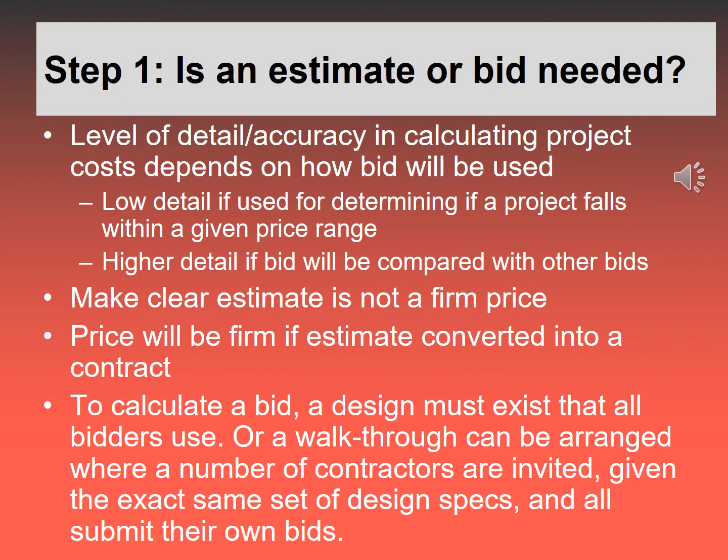Reading down through the actual slide here, an estimate is lower detail, not a firm price. If a price can be made firm from an estimate, you can convert that into a bid or contract. To calculate a bid, a design must exist that all the bidders use, like I said, having a walkthrough done.

Here is another example of an estimate sheet, but this one is filled out, and it's different — it has a lot more detail. Mary Green wants a deck, a 10 by 10 deck with rails and stairs, including staining of the deck, and they've got all kinds of detail here: the paint, permits, travel, etc., quantity, unit price of materials, hours, labor for each of those things, and a total price.

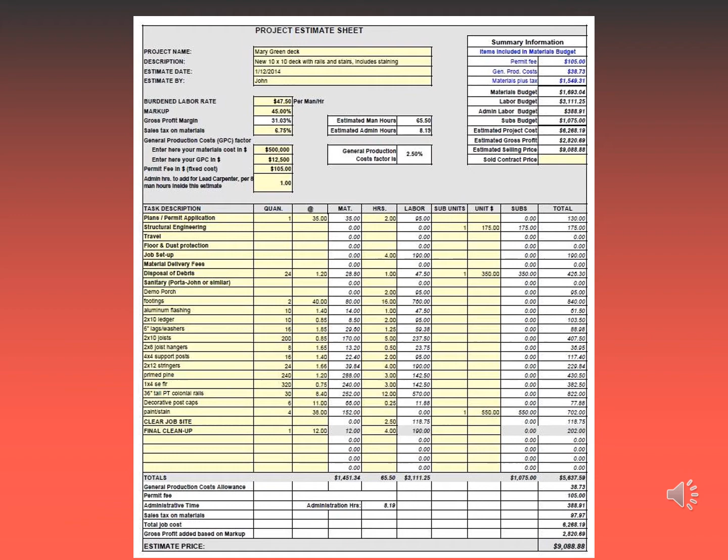$9,088.88. So this estimate is very detailed, but the thing that makes it not a bid is that the contractor is not bound to keep it at that price. It could end up being $12,000, and that would be okay, as far as when the client just gets an estimate and says, okay, go ahead and start, I don't mind, I like your estimate. That's fine, but you're not bound to keep it at that cost. You would try, but if it was a bid, it's a contract — you both sign it saying the contractor has to only charge that amount for that project, no matter what. So that's a difference there.

There are all kinds of things that go into calculating a bid or an estimate. They both need, especially a bid needs exact costs, but you have to be creative — working with the client, knowing what they want and what they can afford and what they're willing to pay, and also your ability to interpret plans and create the specifications or specs from drawings. So you need blueprint reading skills, and we do actually have a great blueprint reading class in our construction technology department.

You need to be able to research cost estimations of different parts of a project — maybe grading of the soil, installation of drainage materials, building of walls, building of decks. And as you progress in your profession, one of the most important things that will help you accurately estimate jobs are your past jobs. As you take on a job, you keep really detailed records of how each part of a job went.

How long it took, how much labor was involved, how many people you needed, things like that, so you know when you get to the next job. Let's say the first job you do is building a privacy fence for somebody between their neighbor and them, and they wanted it to be 6 feet tall, wooden, pretty basic dog-eared panels, etc. So you figured out how long it took to dig each post hole, how much concrete was used for each post, how long it took to install the rails and the post boards and everything in between.

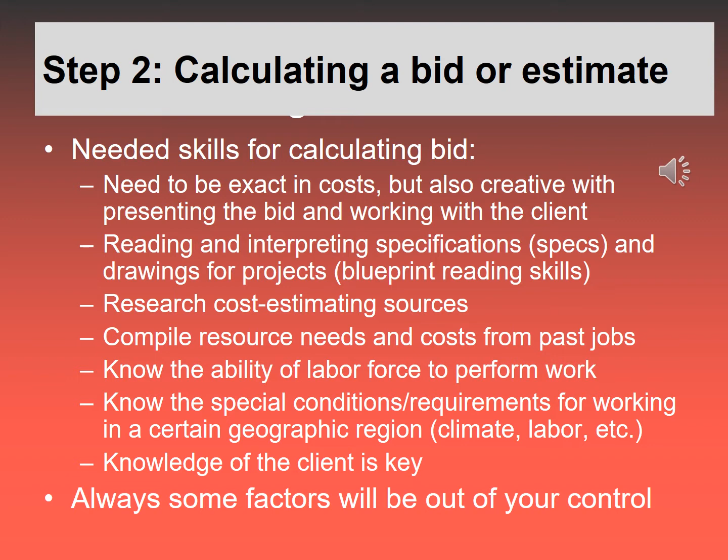Knowing about your labor force is really important too, how many people you need to get a job done, and keep it at that same pace of how many square feet per hour you can do on a patio, deck, or pathway, and which people can keep that work rate up and which can't. Maybe your best two fastest crew members get sick and you've got to use the ones that aren't quite as fast, and that changes the whole plan and the cost to you, and perhaps the client. But as you go, you can learn those things and build in enough buffer so you don't get caught underpaid.

Cost reference guides are useful. They're not perfect for estimating landscaping tasks and how much things will cost and how long they'll take, but they help. Four of the published cost estimation guides out there—Means, Sweets, Kerry, Dodge—will all give you estimates on length of time, materials, and labor for common landscaping jobs like fencing, trenching, wall building, patios, decking, etc.

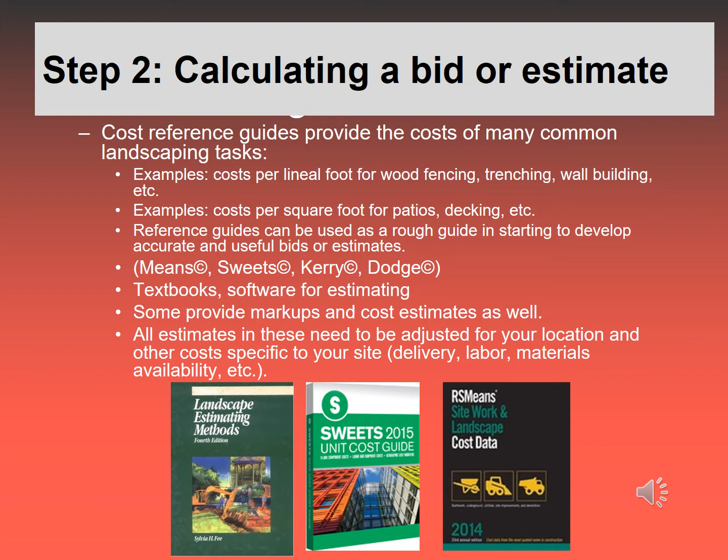These have to be adjusted for your location. They are general guides. So if you look up the cost of a wooden fence, how much it costs per lineal foot for materials and how long it takes for labor, and you apply it to a job in Ohio, that's going to be a different cost than if you apply that same project in Santa Barbara or coastal, warm California. The prices, materials, and labor rates are all going to be different. So you use these guides as a rough guide, and then adjust it to your location. That's the way to use these guides.

And then there are always other things too that are more specific regulatory restrictions and influences on your costs—county building codes, county ordinances, special regulations for work hours, limitations on what you can do with existing plants or not. Labor costs also change for each particular job and place.

If you start a landscaping company after you go through our program and you only work in Santa Barbara, you'll learn about all the requirements within the Santa Barbara County and even the city that you have to go by, and that's all you need to learn pretty much. But if you start to venture out to a different county or state, you'll have different influences that you'll need to adjust your bids and estimates for.

One thing I know about, for example, is that coast live oak trees are protected in our county. Any tree over 6-inch diameter at chest height is protected, and you can't cut it down just to get it out of the way, even if the client says, 'that tree is kind of scraggly, I want it out of here because I'm putting a pool in.' You cannot do that—you can apply for a special permit, but in general they're protected. And when you're doing a construction project, their root zones have to be protected too. So that's something to think about, and that's just Santa Barbara County.

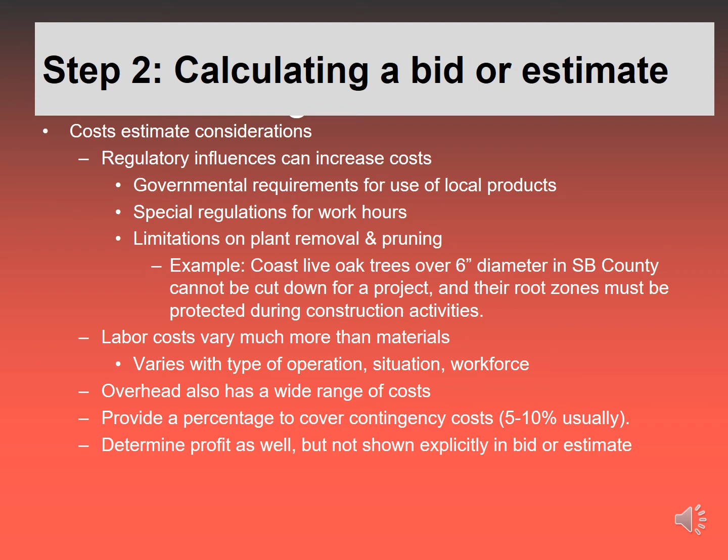You don't write that in your bid—you don't say 'contingency, I'm adding this extra in case I break some sandstone pavers or some of my workers get sick'—but you increase your costs to hedge your bet. And don't forget, profit needs to be put in there too. You're not just covering your costs and paying your workers; you need to make profit to cover overhead and so the owner makes money too.

Calculating material costs, usually a design is created for the site. If you become a landscape architect, you'll create the official permitted designs. If not, you'll have a landscape architect sign off on them, unless it's an informal design for a project under $500 total cost. But you have to be able to interpret the designs and determine what materials are needed for that project.

Something called a takeoff is created, and that can sometimes be done by the vendor or supplier, like Hayward Lumber here in town or Santa Barbara Stone—they'll do a takeoff for you, showing the prices for everything needed for a specific project and tell you the cost. They can do that, but you have to be able to do it too. You're taking off that line item of the project and looking at the cost to make it happen, like all the sandstone pavers, all the base material that goes under the pavers—what's that going to cost? You need to know how to figure volumes, lineal footage, and square footage, and convert that into costs.

The quantities of materials—bulk materials should always be over-ordered, again for contingency, because they vary with application to the site. If you're ordering base material for under a pathway or patio, like road base or gravel, you don't want to end up without enough and have to get another truckload delivered, which is about $75 per truckload. Order a little more than needed just in case.

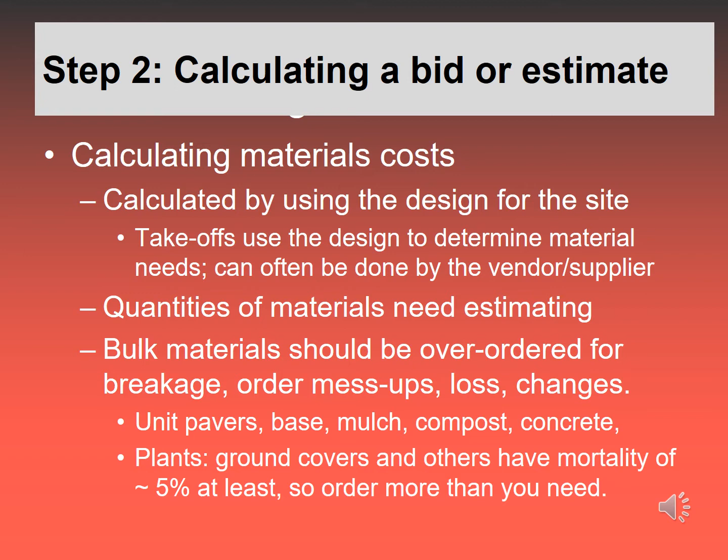Plants too—when you're ordering plants for a landscape job, you're usually going to have at least 5% mortality of what you plant. During that time period, you've recontoured the land, put in the underground irrigation system, put in the hardscaping, the patios, the paths, and then you put in the plants. But a good chunk of those plants will not survive, so you always need to over-order those as well, or at least plan for that.

Calculating labor costs is perhaps the most difficult part of estimating, and you'll get better at it as time goes by. Always keep track of the hours per unit for different types of tasks—the number of hours it takes a laborer to complete one unit of a task. Think of one worker and how long it takes to build one lineal foot of wooden fence. The type of wooden fence would be important to know too.

Or how long it takes one worker to build one lineal foot of stone wall, or cinder block stucco wall, or dig a trench 8 to 12 inches deep—how long it takes to do one foot using a trenching machine or by hand, or how long it takes one worker to lay one square foot of Oklahoma sandstone patio, or prefab unit patio pavers, things like that. You want to break it down to the smallest unit, so you can translate and use that on the next job, for something similar but of different size and dimension.

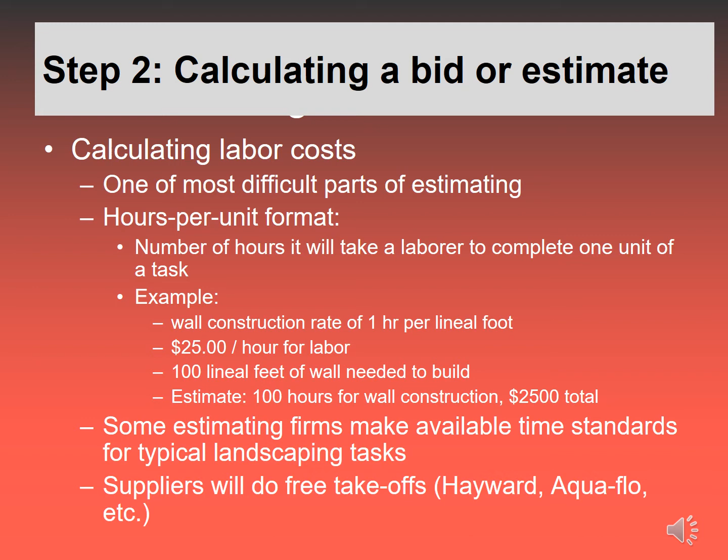There's always contingencies. Costs will change even if you get all the materials and labor dialed in—you're going to have things you just can't account for. People get sick, equipment breaks down, things take longer, you run into underground gas lines or water lines no one knew were there. Weather can get in the way—a big snowstorm or rain delays it—and your materials can also be delayed in delivery, which is very common.

So usually 5 to 10% is added on for labor and material costs just for contingency. That would include the contingency I talked about before with breakage and plant death. On everything, you want to add a little bit more just in case.

And then worker efficiency changes too. Think about it - if you're trying to keep track of how long it takes one worker to build one lineal foot of standard wooden fence, it might take them 2 hours on Monday, but 3 on Friday. They can get tired, worn out, or bored. So efficiency of labor changes too.

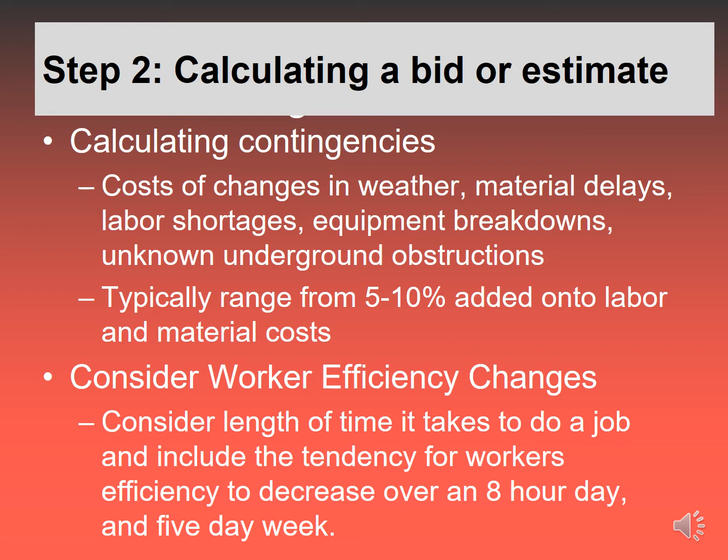And that's just a general thing. You're going to have to think holistically, and you can keep detailed notes, but some part of you is going to have to learn and gain intuition too about this with certain work crews. Their ability to work at a certain rate will shift and change, and you'll have to get a feel for that on your own.

Lastly, as far as costs and estimation goes, overhead costs. There are 2 types: assignable and unassignable. Assignable is the non-labor and non-material costs that can be directly attributed to a project - permits needed for that project, maybe a permit to do an addition or a greenhouse on the side of a house which changes the structure, or equipment rentals, special insurance or bonding for that project, temporary utility costs. You might have to bring in extra electricity or a panel just for the construction.

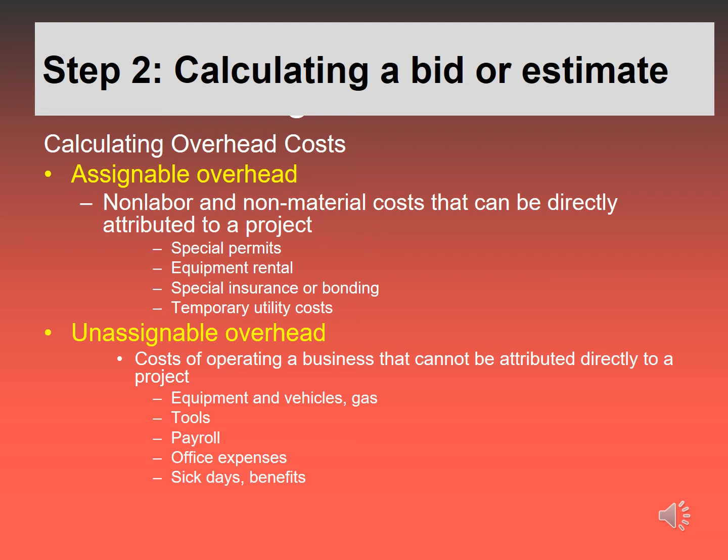Those are things that can be assigned to a project, and the client pays. Unassignable is stuff your company has to pay. You can't make the client pay for the shovels you own, or tools used in all jobs, or your payroll, office expenses, or sick days. Those have to be included in your bid and estimate implicitly - not stated directly, but your cost of labor has to be enough above your actual cost to cover these things too, including your profit, but also all these unassignable overhead costs.

Here are 2 examples of completed bids, with detailed description of the scope of work, line items of what's involved, and the prices. The one on the left is typically more detailed as far as exactly what the costs are for the landscape, the lightscape, and the irrigation. Both would require signatures of the client and contractor on the bottom to turn this into a formal bid, which becomes a legally binding contract.

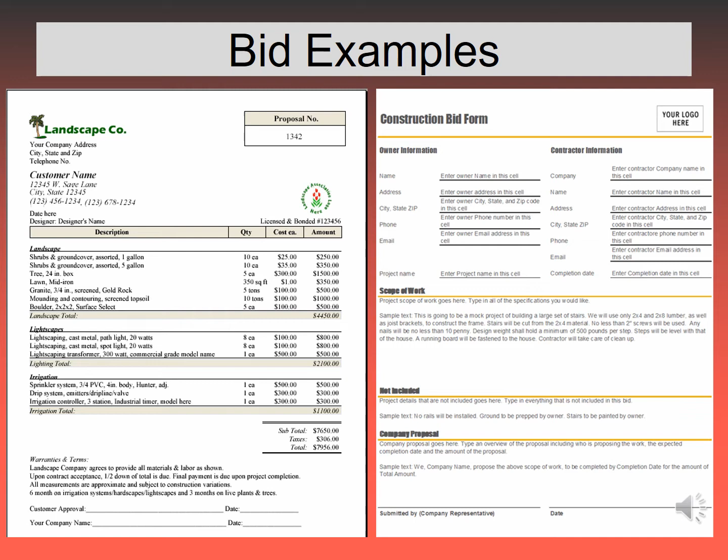Also, don't forget about calculating profit - how much should you charge? Probably at the beginning of your career you'll tend to underbid things. You want to be the one that does it more cheaply, and you might not have as much confidence, so you don't want to charge people too much. You're trying to gain a reputation and experience, you're excited to have a client. But over time, you'll start to dial in what you feel you're worth and what you want to charge for profit, and what you can ask too.

You don't want to ask for too much or you won't get clients. So look at the current market - what do other landscape companies charge for labor, or for similar types of jobs? What is the competition charging? What do you need for income to make your company stay afloat, and to pay your own personal expenses?

Anticipation of upcoming business conditions is really important in landscaping because it's a seasonal thing. You've got a lot of people working and options for lots of clients in the spring and summer. That's when people want to get landscaping jobs done because they're busy, things are growing, and it's the right time to plant.

And you have to plan for this - okay, this is looking great, but I've got to make enough money to get this company through the next winter when things go dormant again, the plants, but also the business. You want to be able to keep some of your workers on. So you have to think about that - you're going to be charging more than you normally would just because of the dry spells in the business.

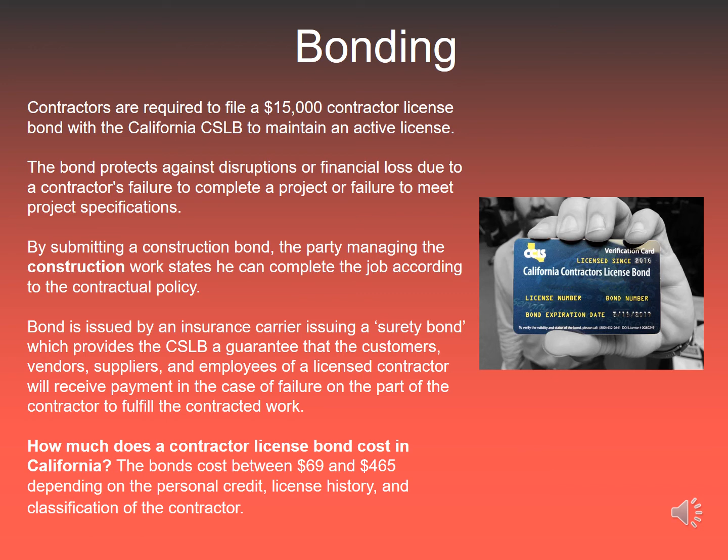So let's go back to how you pass the exam. The C27 exam is two-part: laws and trade. The law questions are legal focus—how to obtain permits, how to handle inspections, and general safety requirements to follow. There are also trade questions.

Those are the things we talk about mostly in this program, the environmental horticulture program—how you perform the tasks involved in landscape contracting. There are 100 questions per part, it takes about 4 hours, and it costs $250.

And the license itself costs money too. So you've got to go to school or get experience, get that bond, pass the test and pay the fee for the test, then pay for the license—and keep paying every couple of years for your license too.

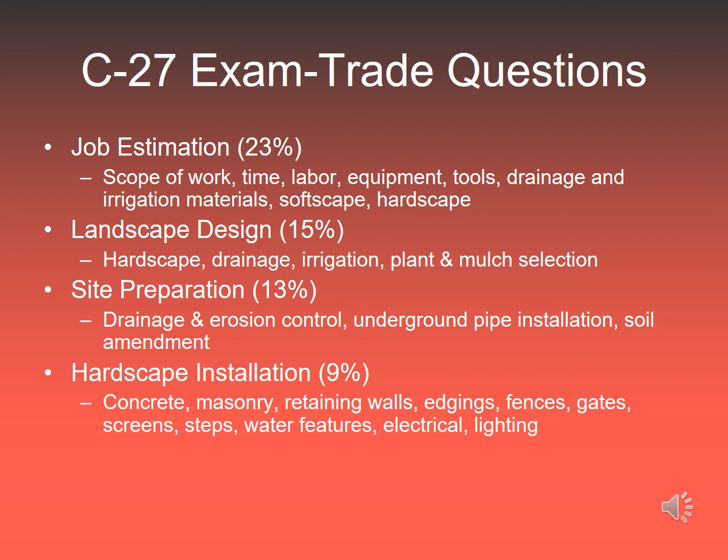Taken right off the CSLB website, the trade questions are shown here with the percentage of questions on the exam given in parentheses. 23% of the questions, which changes a little year to year, are job estimation questions—about a fourth of the exam. Landscape design is about 15%, site preparation 13%, hardscape 9%. All these subtopics under those headings are the types of questions you'll be asked.

I've had lots of students take the exam, and I haven't heard anyone having big trouble with it, so it's not an extremely hard exam. You do have to study for it though—there are prep courses and prep books, and our courses help you a lot too. You should do fine.

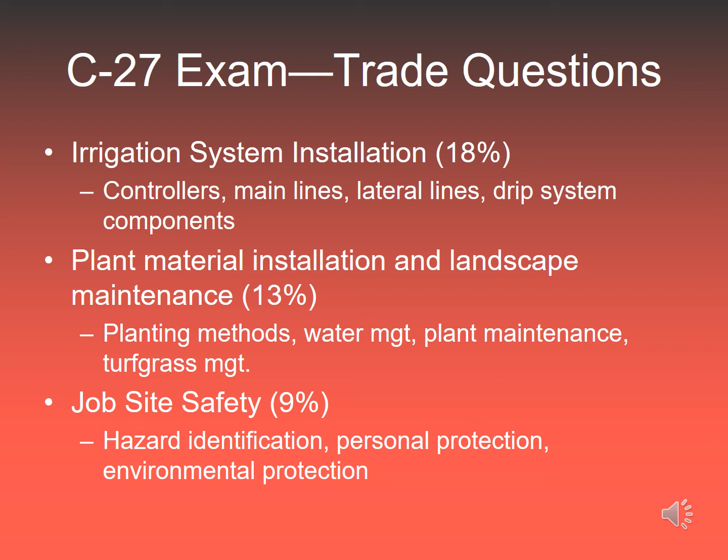I know some people have taken in-person prep courses, and there are online prep courses too—those cost money. But if you wanted to get your C27 license and get a bit of schooling, the three courses that would help you best are landscape maintenance, landscape construction, and landscape irrigation. Those are the ones most focused on the landscape contracting profession and the landscape contractor's exam.

The next few slides are questions from the Contractors State License Board exam. I'm not sure if they're still using them.

A cool season lawn grows during the winter—that's part of why it's called cool season, since it stays green then, but its growth still slows down. When growth slows, most of the carbohydrate storage and energy goes into the roots. That's the time to cut thatch down. As a lawn gets thicker, sometimes it has to be scalped or cut way back until it looks brown for a while, but you have to do it or it'll get too thick and suffocate itself. That's the time it's dormant and will be damaged least by harsh cutting.

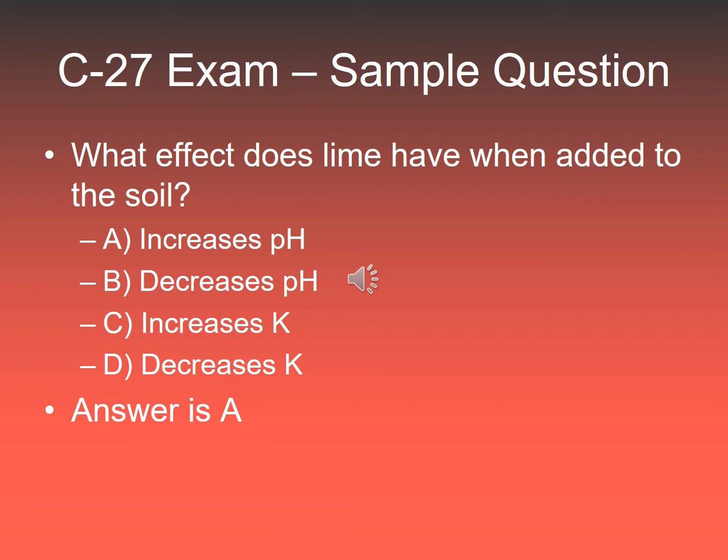Another question: what effect does lime have when added to the soil? Does it increase pH, decrease it, increase potassium, or decrease potassium? Lime is added to soil that's too acidic—it's mostly calcium carbonate, and it will make the soil more alkaline, less acidic, which means a higher pH. The pH scale is kind of backwards: the higher the acidity, the lower the pH. So the correct answer is A.

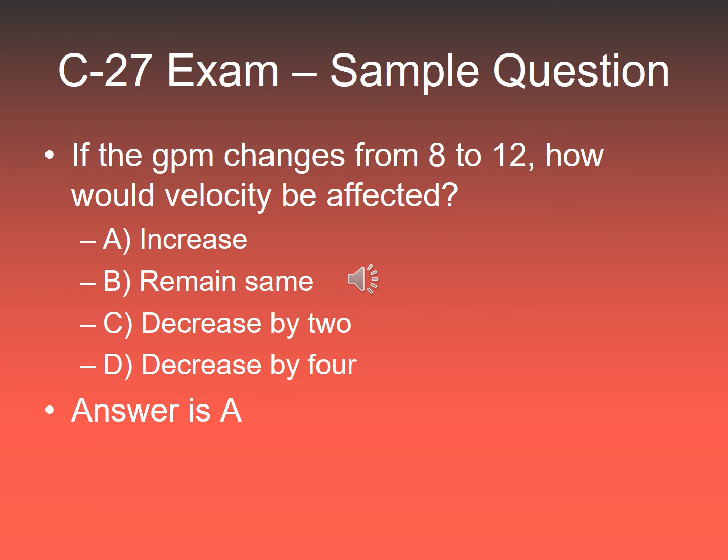If the flow rate in an irrigation system changes from 8 to 12 gallons per minute, how is water velocity affected? Would it increase, remain the same, or decrease by 2 or 4? If you increase the flow rate, it's not going to decrease the velocity—it will either increase or remain the same, but going from 8 to 12 is definitely an increase. So A is the correct answer.

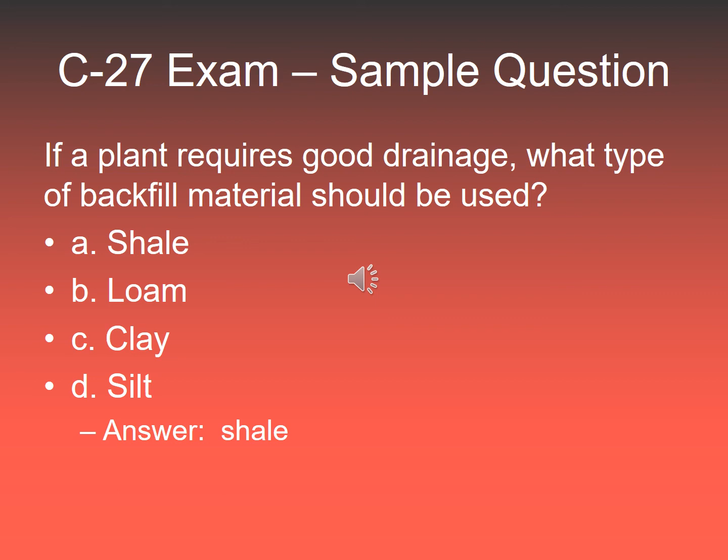What is the maximum distance between joints in a 4-inch thick concrete patio—8, 10, 12, or 14 feet? The answer is 12 feet. Joints should be spaced no more than 2 to 3 times the slab thickness in feet, so a 4-inch slab should have joints approximately 12 feet apart.

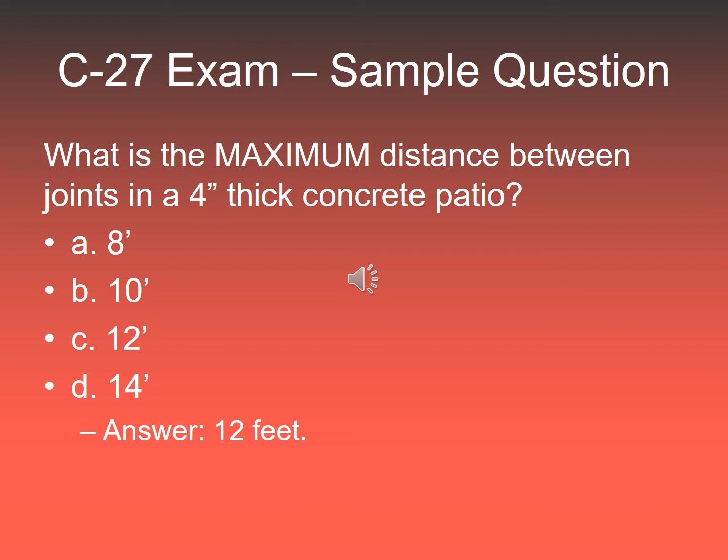The most common option to prepare for the C27 licensing test is an online course or a CD study guide. There are lots of online, in-person, and hybrid test prep options. There's a good summary of what to expect linked here to a YouTube video on the exam.

A good organization to join is the California Landscape Contractors Association, which is different from the CSLB. Join their website and their LinkedIn discussion group—it's really good, with lots of great tips from contractors discussing topics like maintaining fruit tree orchards or failing retaining walls. I've followed that discussion group for a long time and learned a lot. Attend a local chapter meeting, like the Channel Islands chapter, to get more information on testing and licensing.